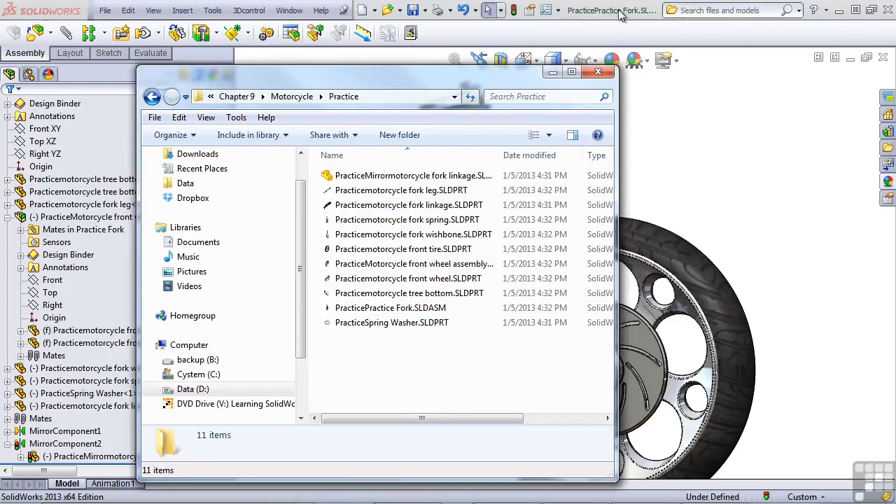Notice also that the name of the current file has been renamed. Control-Q on the keyboard to rebuild, to get rid of the rebuild symbol that was down here, and Control-S, which is the Windows shortcut for save.

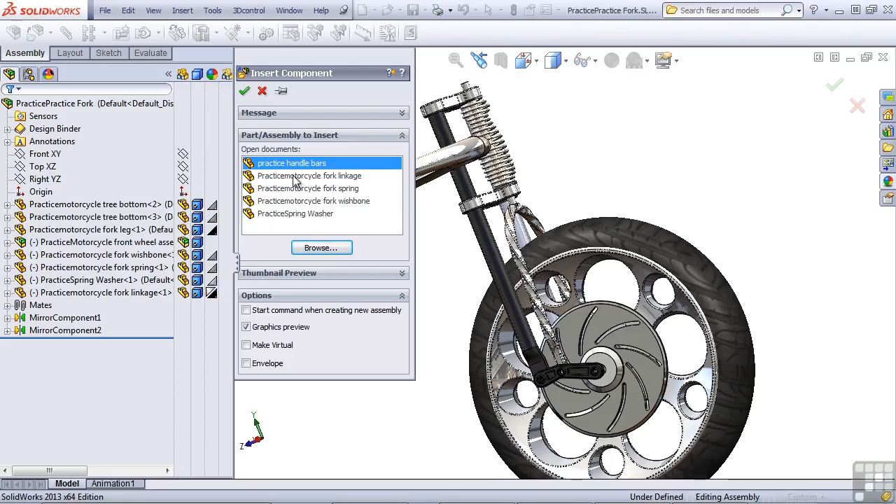Now that we've got that out of the way, let's put the handlebar into this assembly. So I'm going to insert Component, Existing Part, and I'll browse. I'm looking in the Practice folder, and what I'm looking for is the Practice handlebars. These are the originals. Now the Practice handlebars I can just put into the assembly.

All right, now I'm going to mate these in place as much as I can. I'll use the right plane of the assembly, and I'll use a plane from the part. This should be the right plane, yes.

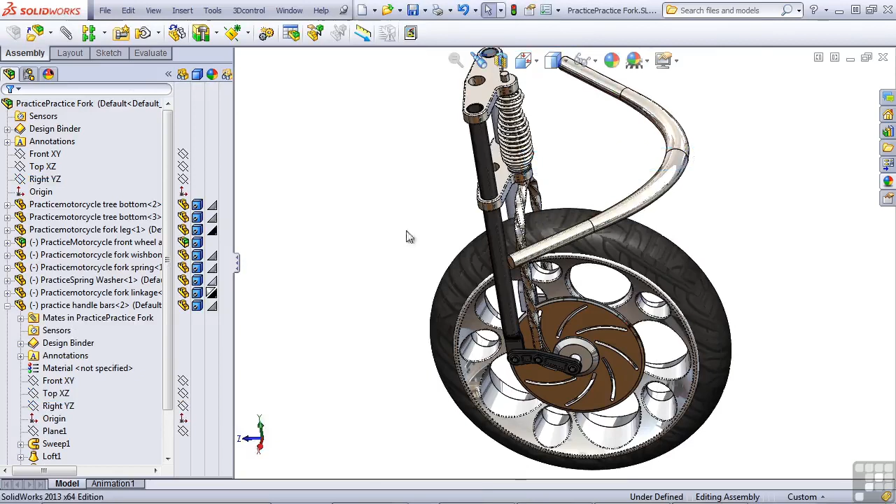Mate those together. Okay, now I'm just going to move these around visually, trying to place the fork in the orientation it's going to be in, and put the handlebar up here, and maybe just visually place the handlebars where I think they will belong. We can adjust this later if we need to.

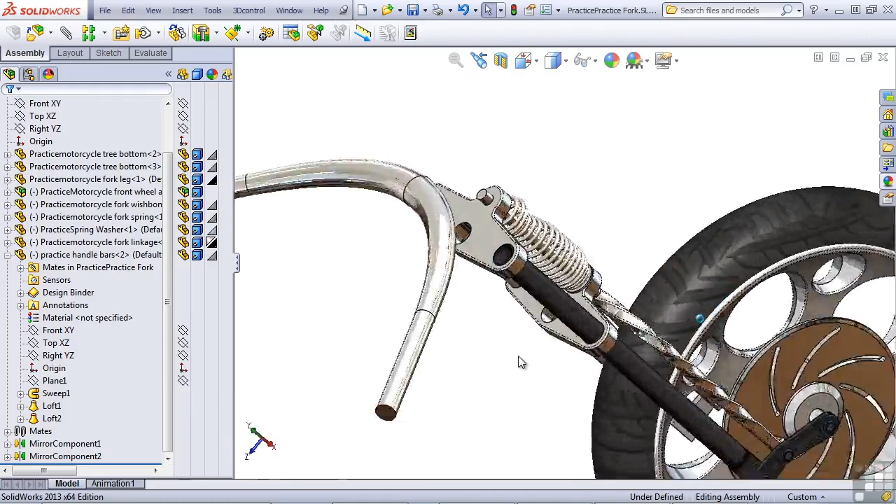So from here, what we need to do is create some sort of structure between the handlebar and the rest of the fork. So this is going to require what we call in-context modeling.

The first thing I'm going to do is edit the handlebar in the context of the assembly. To do that, I'll just click on the handlebar, then click Edit Part. This is similar to editing the part in its own window, except that here you can make references to other geometry. This is a very powerful technique, but it can also be very costly.

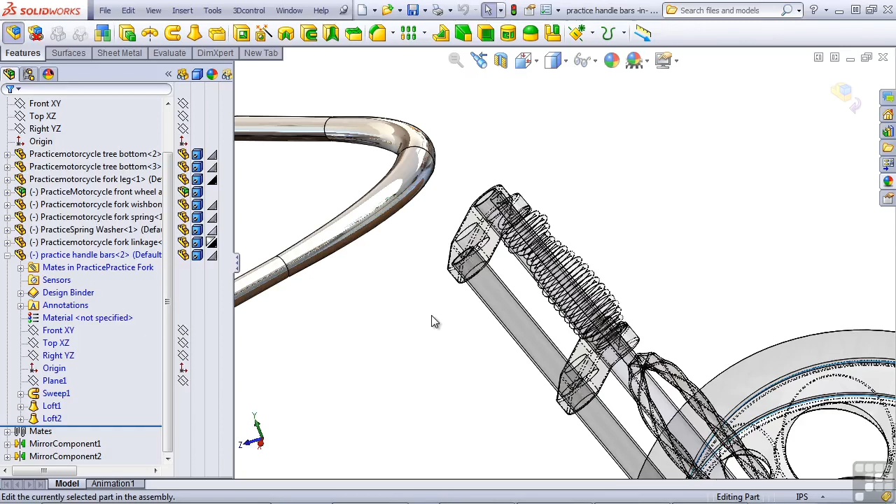In-context modeling complicates the file management side of things, and it also complicates change management. If you need to make a change, it may be driven by another part in a certain assembly. In any case, let's take a look at how to make this relationship work.

I'm going to create a new plane for a sketch, and we're going to sweep a feature that curves off of the handlebar and then goes in a straight line down inside the leg of the fork. In order to do that, I need a plane that goes through the center of the fork.

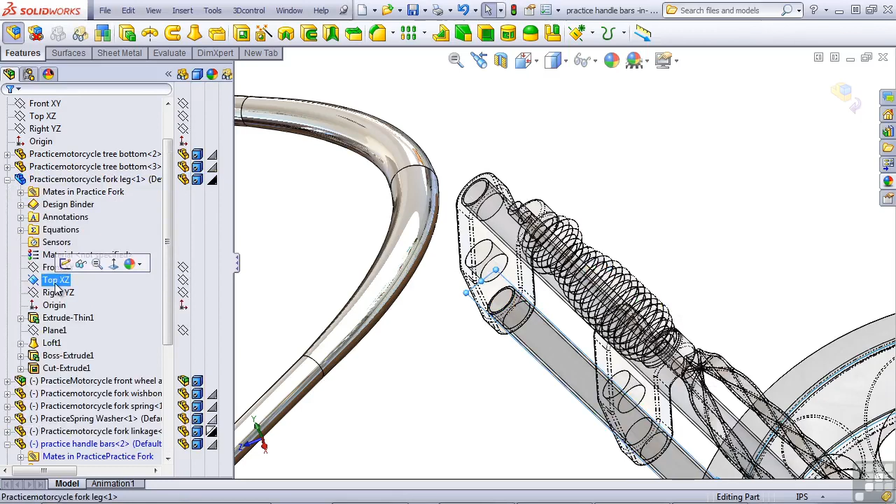So if I select the fork, I can find one of these planes, let's say the top plane, and open a sketch on that. Now I don't have any sketch toolbar, and there's no sketch toolbar in the command manager, so let me add the sketch toolbar.

I'm going to right click on the toolbar area and select sketch. From here, I'm going to draw a line through the center of the tube up to the midpoint of this edge. Make sure that goes vertical. And then get a tangent arc and bring that tangent arc here.

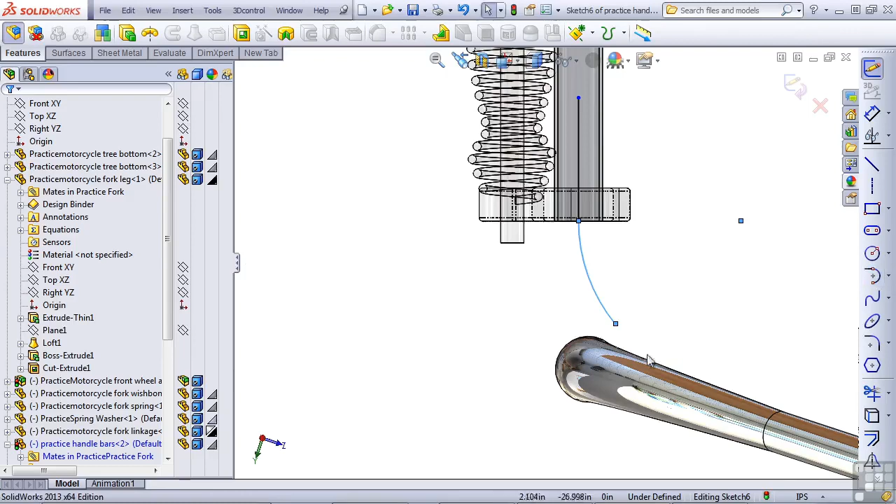Next, what I need to do is find out where this plane intersects the handlebar. To do that, I'm going to use the intersection curve, where I can select this face and then click on the green check. Click it again to get rid of the tool. Take this spline that's been added and convert it into construction geometry.

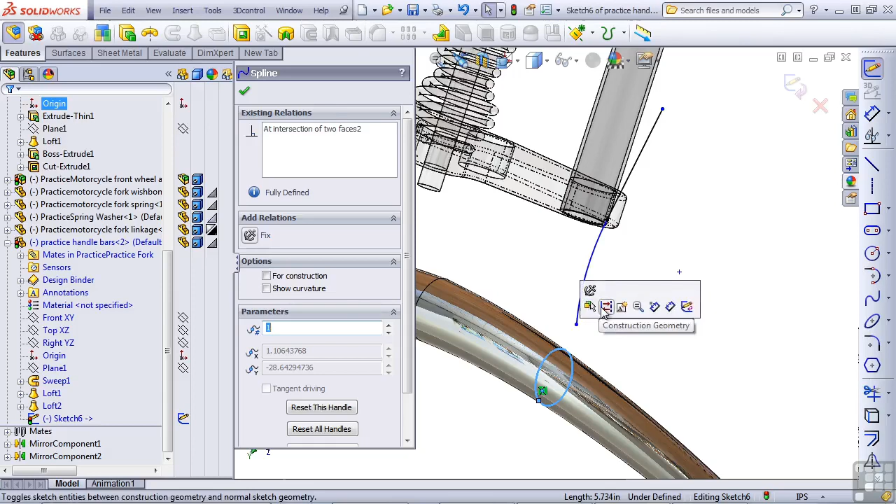Now notice something unintentional has happened here. And I need to demonstrate things like this happening so that you get a full view of the types of things that can happen to you when you're designing with in-context design.

Notice that the handlebars have moved, and this line is supposed to be right down the center of the fork blade, but it's not. So let's correct that.

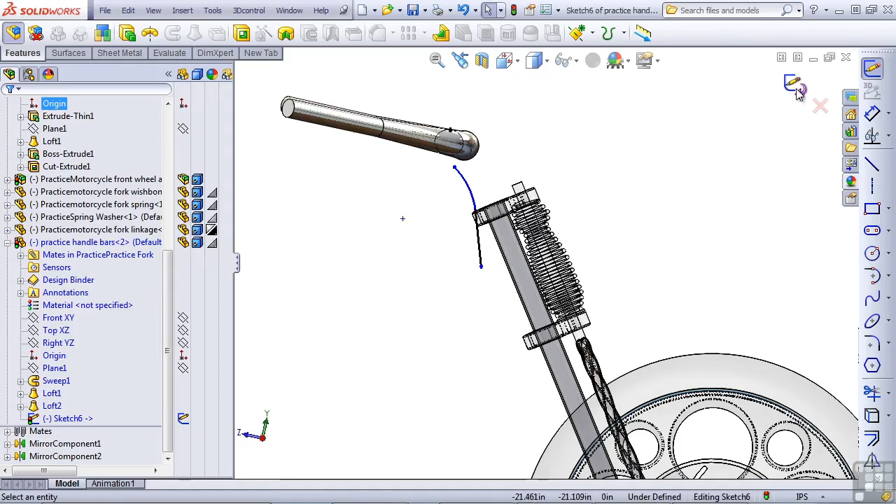If I exit the sketch, notice what's happened. As soon as I exited the sketch, the part went back where it was supposed to go, but now I'm able to move the part with the space ball. And if I exit editing the part, notice that there's a rebuild symbol, and this is again incorrect.

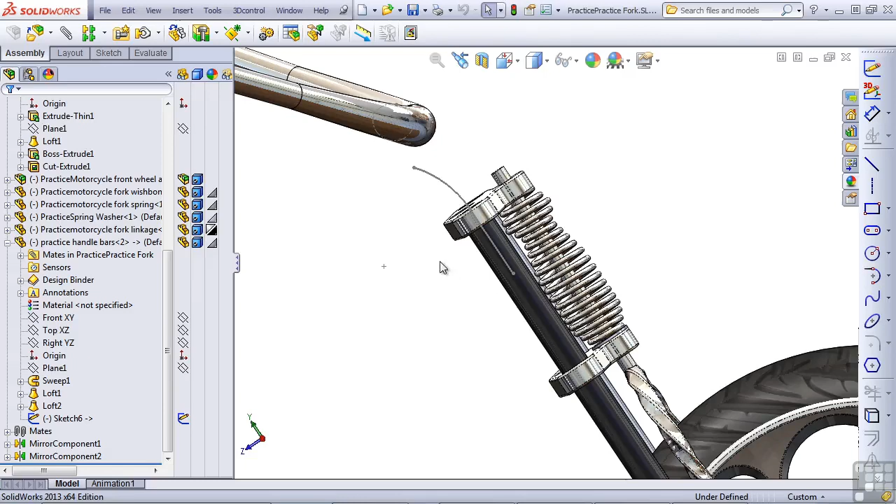Pressing Ctrl Q on the keyboard to rebuild, the sketch line updates, but the handlebar is in a drastically different position than it was originally.

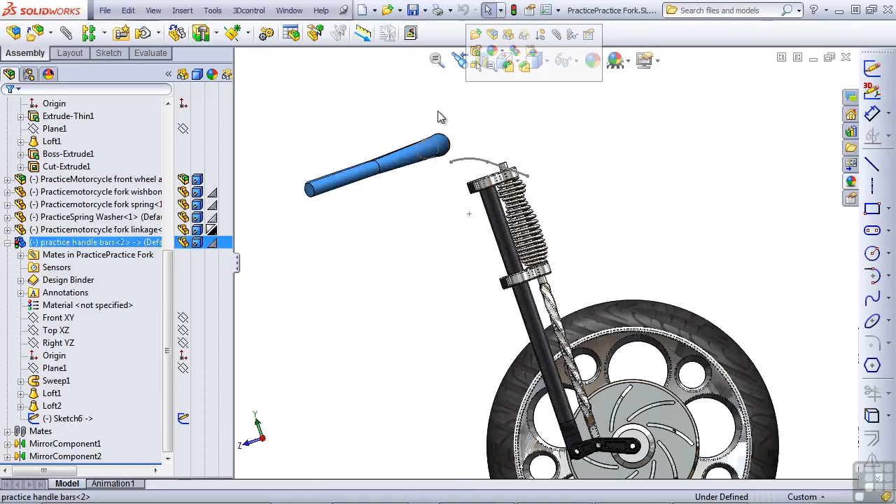So let's move the handlebar and then fix it in space. I'll grab that with the space ball and put the handlebar where I think it needs to be, and then right-click on the part and fix it.

This demonstrates one of the primary best practice rules for working with in-context relations, and that is that you should never have relative motion between parts that have an in-context relation.

That is to say that the handlebar and the fork itself should never move relative to one another if they're going to have this type of in-context relation.

Now that we've remedied that situation, we can go back and continue to design the connection between the two.

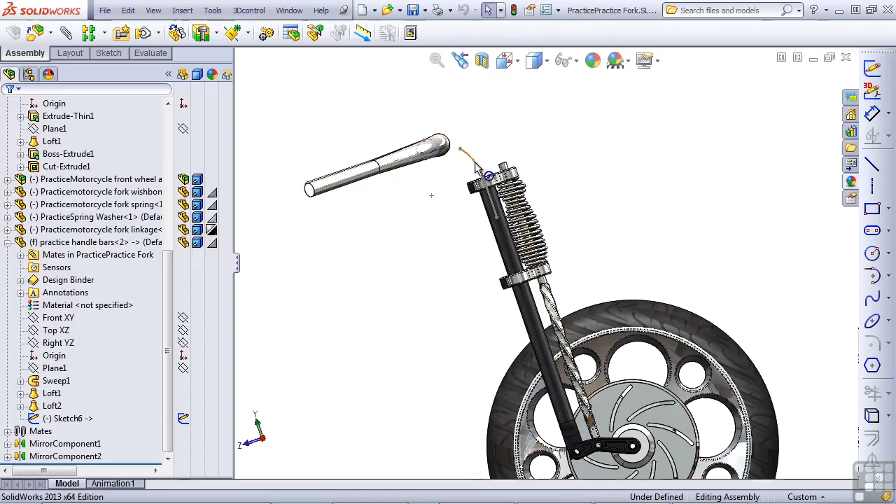If I right-click and edit the sketch, I'm back in edit part mode while editing the part in the context of the assembly. I'll connect the arc to the spline, and we're going to use some construction geometry to give these two the proper relationship.

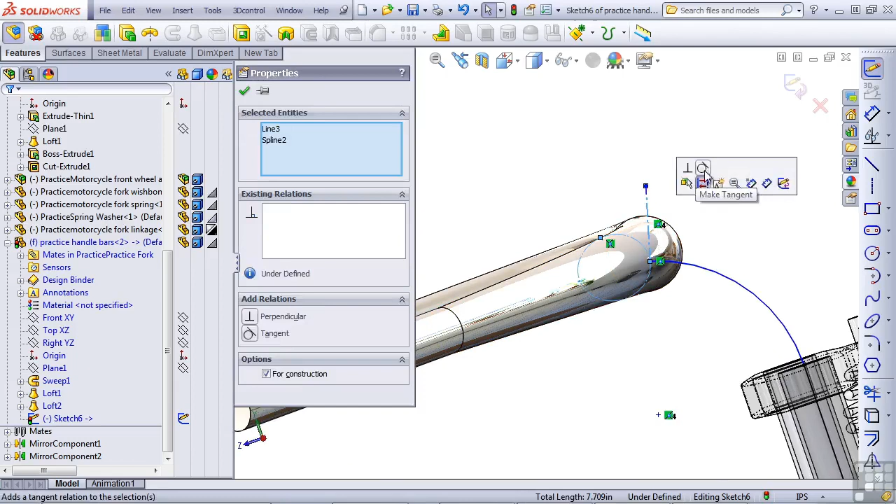That construction line will be coincident with the center point of the circle, and at the same time, the construction line will be tangent to the spline. This means that the arc hits the spline as close to perpendicular as possible.

From here, we need to measure the diameter on the inside, and that's 1.25 inches. So let's create a new plane that's perpendicular to this line at the endpoint. I select the line and then Control select the endpoint and create a new plane.

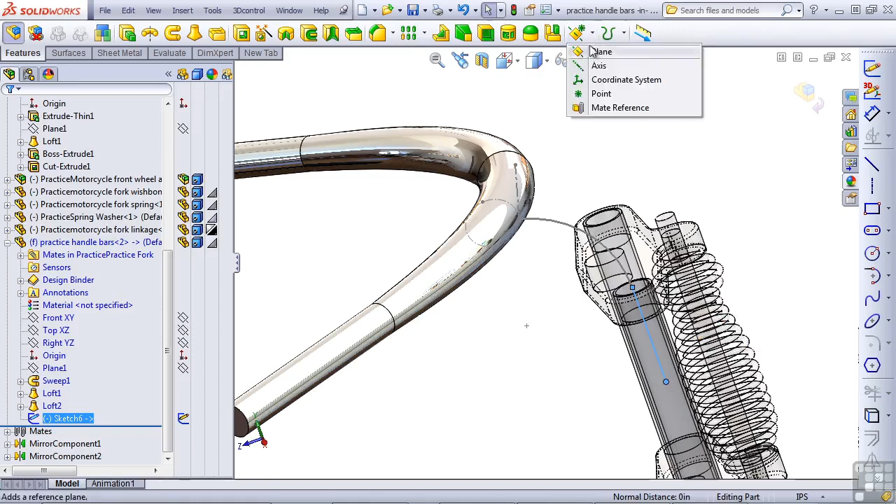On the new plane, I draw a circle, and we'll give it a diameter of 1.24. That allows it to slide down in there.

And now we need to connect the handlebar. So let's use the sweep feature with the circle we just created and the sweep path. Now this is not exactly correct.

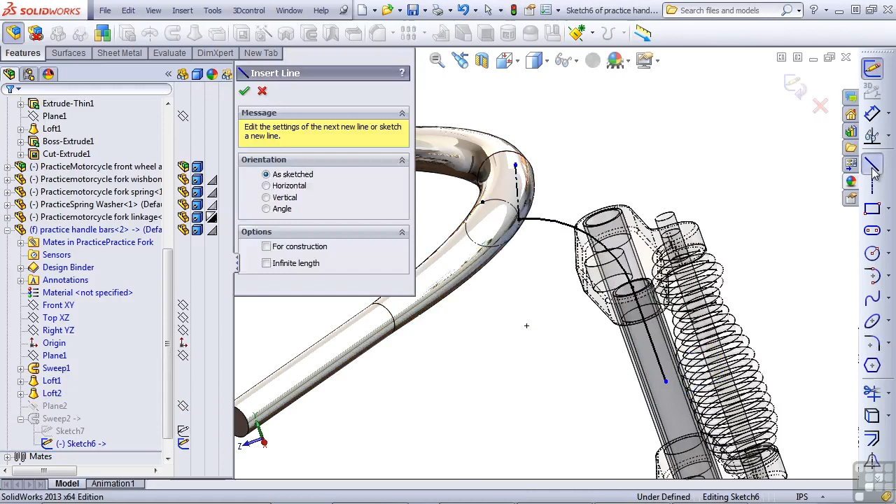We can come back in here and edit the path to include a short straight line. And let's be correct here and put a dimension on this of 1 inch, and also put a dimension on this just to limit it.

So this line has been given a 1 inch dimension, and the rest of it is 3.75.

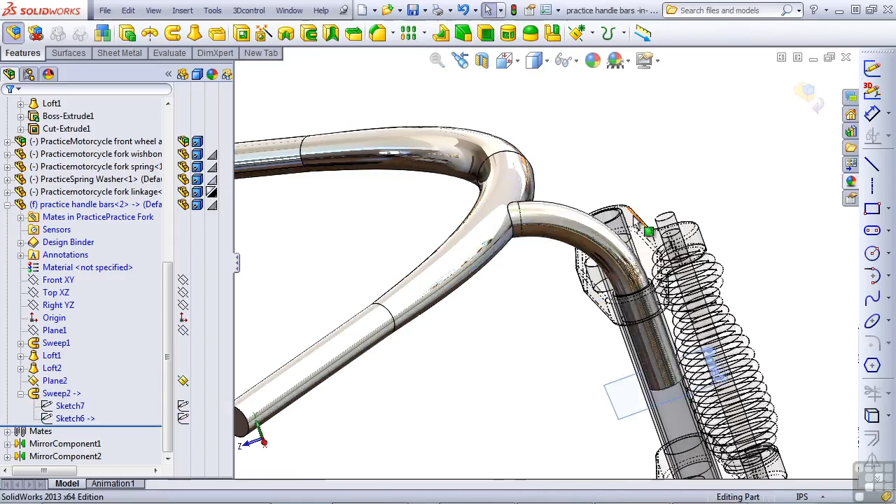So we'll exit. And now we have this feature coming out, connecting to the handlebar. We just need to mirror it.

And in this case, we're going to mirror with a local plane. It's better to work with a local feature if you can. Local meaning in the current part rather than an assembly feature.

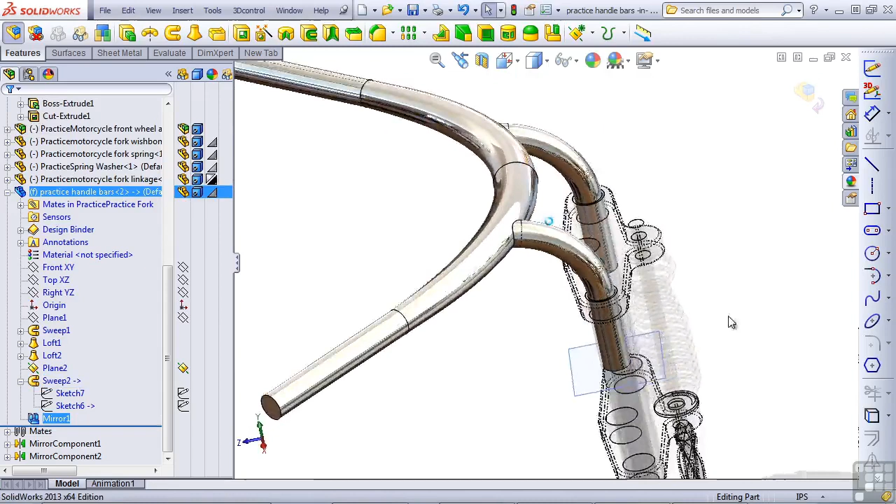And there's the fork. Let's exit edit part mode. Puts us back into editing the assembly.

And now we have our handlebar mounted to the fork. Let's go ahead and put the controllers on the handlebar now.

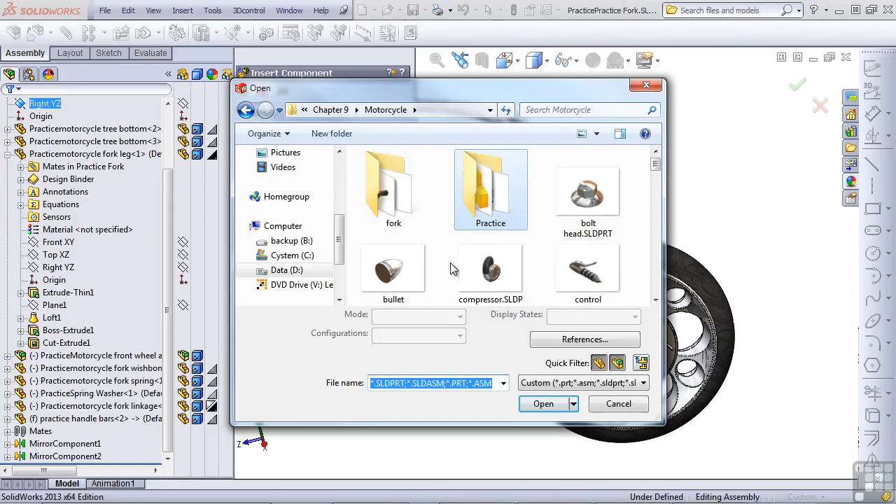We'll insert component, existing part. We'll browse for this in the regular motorcycle folder. And here's the control.

Now in our case, the controller is symmetrical. In reality, there will be a left and a right hand version. So we'll be able to get away with this in the case of this CAD model, where you wouldn't get away with it in a real assembly.

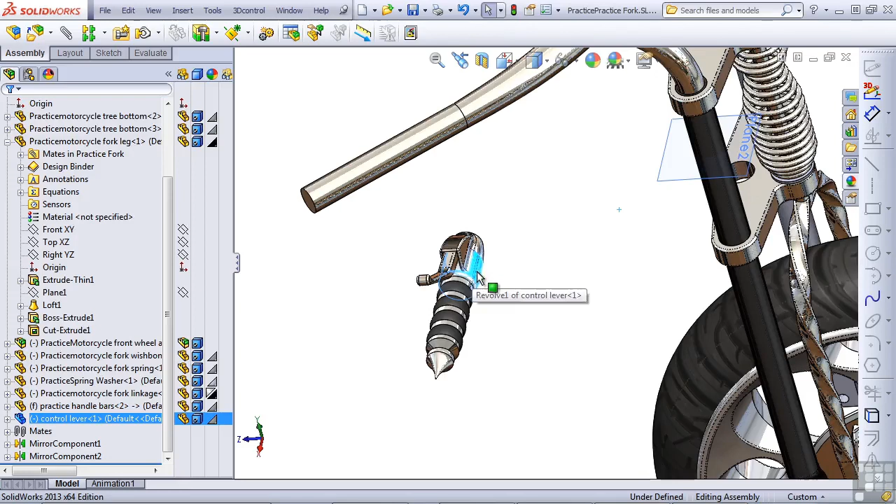So I'm going to grab this part and use SmartMate, hold down Alt, grab the center, and push it onto the handlebar.

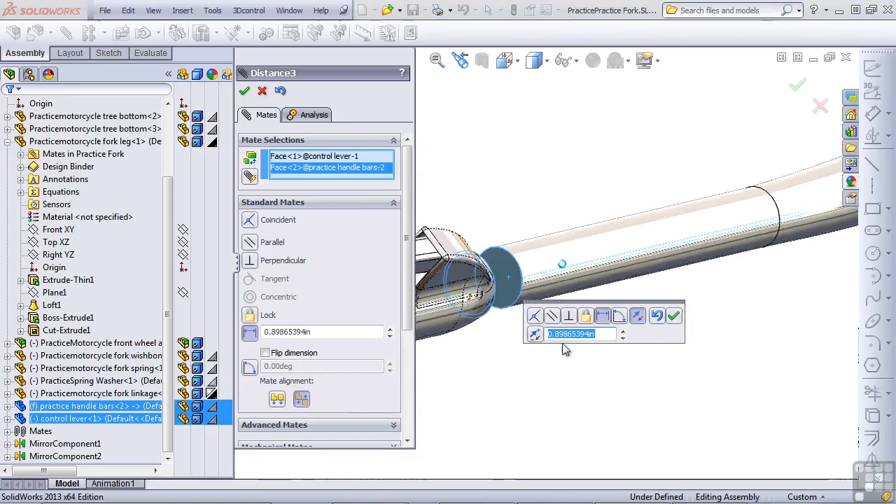And I'm going to use another mate, not a SmartMate this time, but a mate that mates this flat face with this flat face at a distance. And we want to flip that distance, so we'll use the flip dimension and actually crank this up to 7 inches.

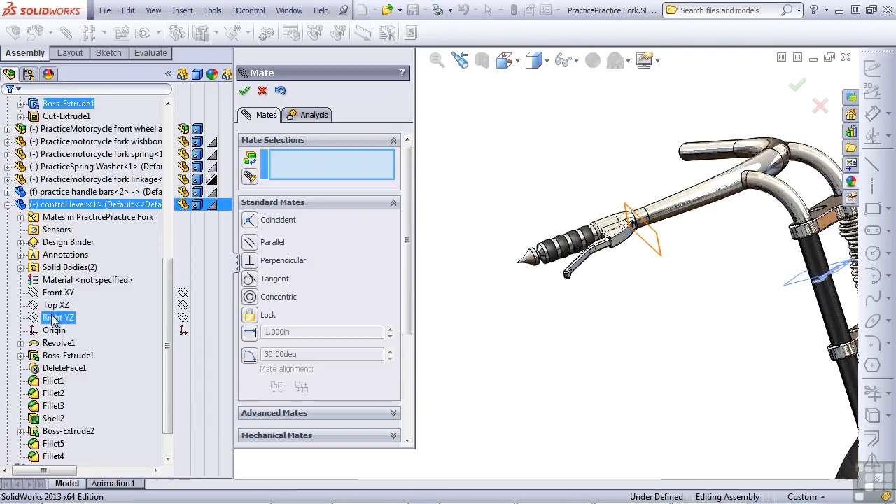Now, the next thing we need to do is locate the control rotationally. So I'm going to get this where it looks about right. Use a plane that goes through the center of the part and a plane that goes through the handlebar.

And mate them with an angle mate. SOLIDWORKS remembers the angle where we had it set up visually before.

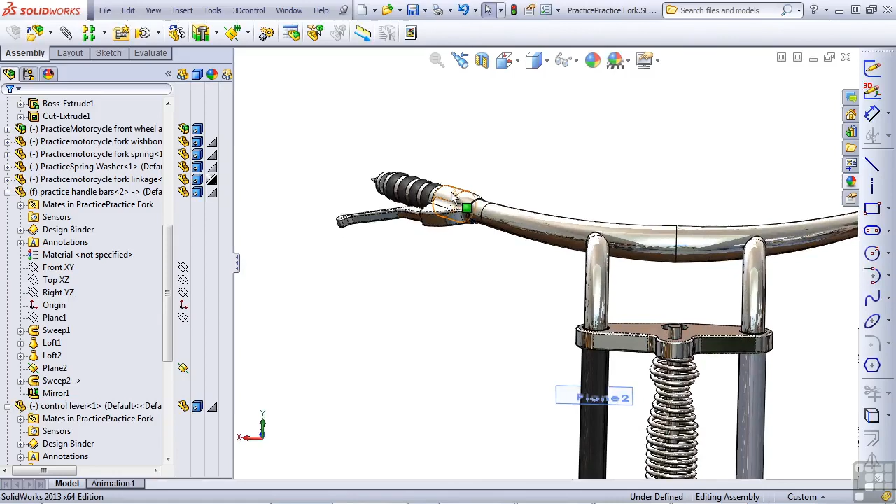And now we want to put another one on the other side. So let's Control drag to make a copy, Alt drag to get the concentric SmartMate, and then just drag this out of the way.

Let's get the distance mate again, where we select this end face.

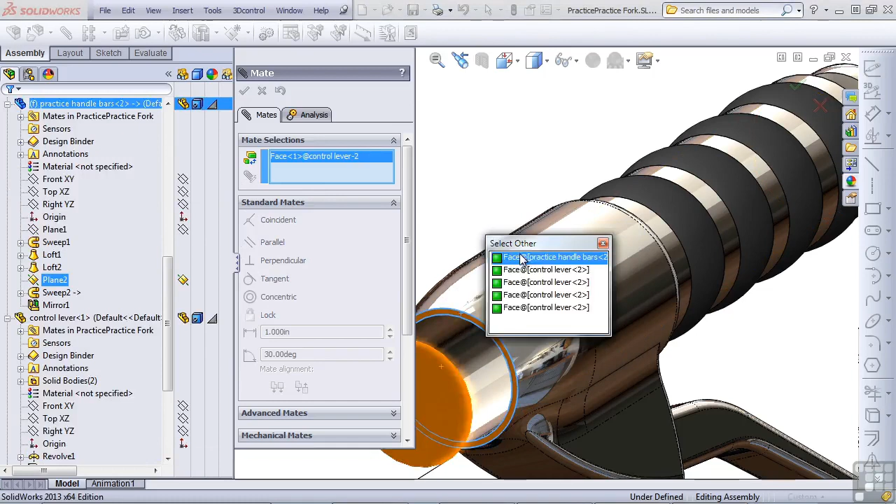And let's use Select Other this time. I'm going to right click, use Select Other, and this will give me a list of the other faces that I could select. So the first one in the list is the one that I want.

Distance, 7 inches, flip dimension. We want to mate together the planes that we mated for the previous control lever. So let's look at what that was.

This was the top of both parts. Okay, so let's look at the top plane of the control lever and the top plane of the handlebars. And this angle was 111.

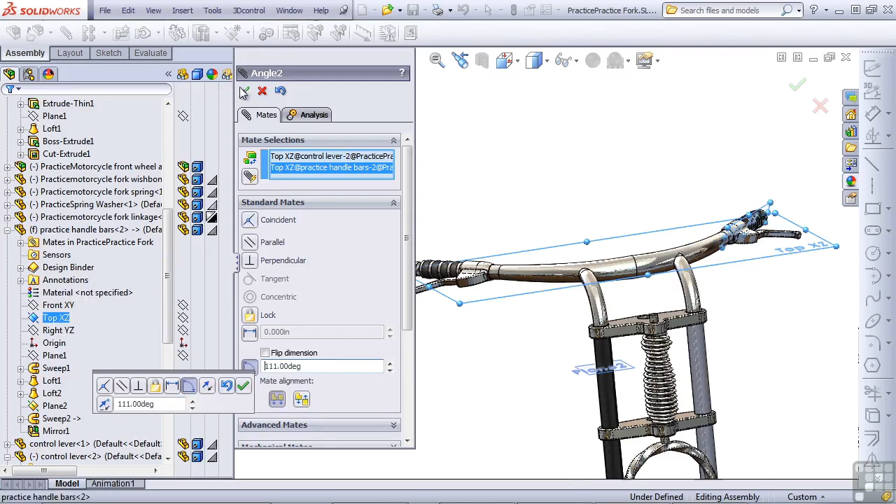And we'll say okay. Now we've got these 3 parts, the handlebar and the 2 control levers, which really are handled best as a subassembly. So let's reorganize these as a subassembly.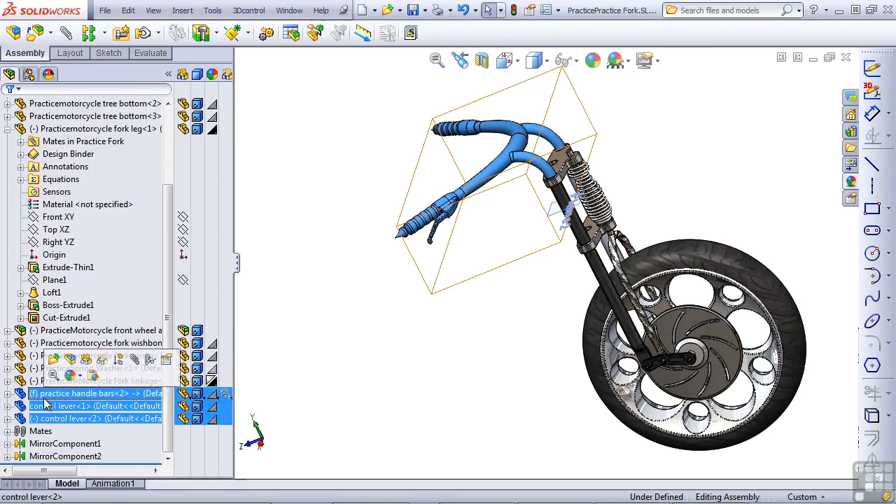I'll select the bottom control lever, control select the practice handlebars, then right click and select the Form New Subassembly option here. This creates a new subassembly.

If I right click now, I can save this subassembly to an external file. Right now, that subassembly is what we call a virtual subassembly. It is only saved in the context of the assembly. So it doesn't exist as an external file.

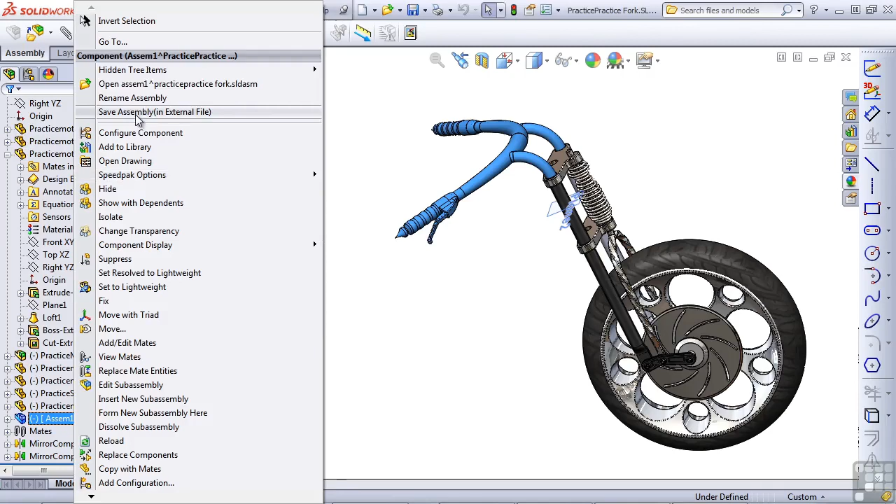I want to save all my files, parts, and assemblies as external files. Double click this to rename it as a practice handlebar assembly. I'll say OK. And now we have a practice handlebar subassembly.